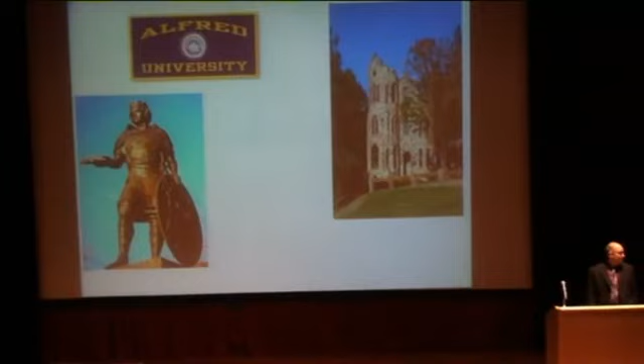So I want to start out talking a little bit about Alfred University, because it's had such a profound influence on me. Anyway, Alfred basically, when I came here, the only program they had was ceramic engineering, so that's what I studied. I wanted to be an engineer, and that's what we did. Ceramic car engines were going to be a thing of the future, and 40 years later, they're still a thing of the future. But regardless,

I want to take a second to acknowledge some of the people that at that time, when ceramic engineering was in its heyday, and the professors here. We didn't realize it at the time, but you look back now, we actually had like a Hall of Fame. This was like the New York Yankees of instructors for ceramic engineering.

Professor Burchett organized the study abroad program, which I participated in and did 8 months in Germany. Professor Pye is a world-renowned glass scientist. Professor Burdick, who's in the audience today, was a great instructor. Professor Tuttle for electrical ceramics. Professor LaCourse, who I had breakfast with this morning, for glass. And Professor Johnson taught us mud lab and how to get our hands dirty, really understand ceramics.

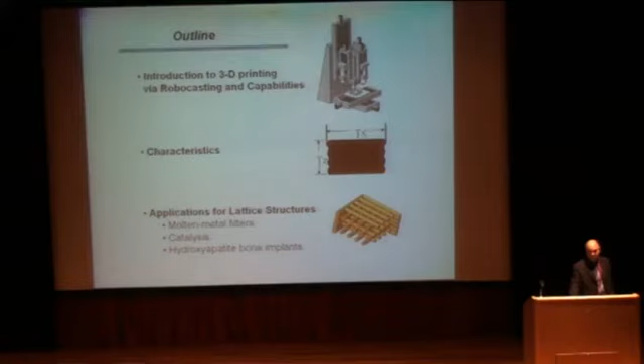3D printing, I think it's probably commonplace now, but when we started this work in the 90s, it wasn't. It's the idea of layered manufacturing. So instead of molding a part or machining a part, you're going to actually build a part. You can make a CAD model of a part, then build it in a series of layers, putting those layers together in some clever way so that you actually have some three-dimensional shape without ever machining or molding. Regardless of how you do that, that's the bottom line.

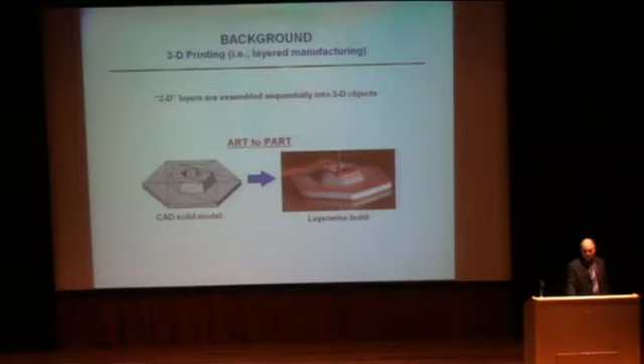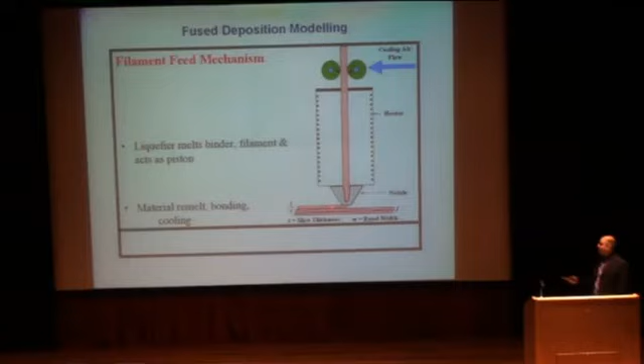It's an additive technique, and 3D printing has sort of become a universal name to describe that, when in reality there are several different ways of doing that. The most popular method is taking a plastic filament and heating it as it goes through a heated nozzle, and then depositing that plastic in such a way that it's molten here and then solidifies here. And so these are all the plastic printers that you see out there.

The most popular one right now is the MakerBot. With MakerBot, you can make unbelievably interesting, intricate, colorful parts out of different plastic materials. So they're really pretty and cool, but as far as technical applications, they're a little bit limited. But that's sort of where we're headed.

Now there are several other techniques for doing metals and some for doing ceramics, but I don't want to take the time to go into that unless somebody really wants to at the end.

What I want to tell you is the inspiration for my technique, or our technique, called Robocasting. It's along the lines of ancient Indian potters in New Mexico and Colorado who would take clay and roll it out into strings, then coil that clay up, layer by layer, until you got some sort of pot. So this isn't a new idea of how to make ceramics in layer manufacturing. It's several thousand years old.

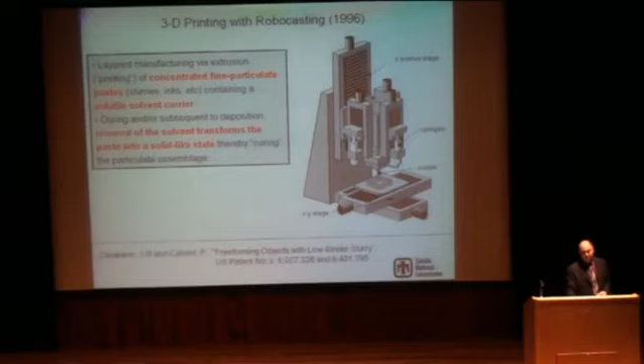If you look at a pot that's made like that, you can see the individual layers, but what you end up buying at the market, because they'll smooth this and then paint it, looks more like something finished. But it's made by a layered manufacturing technique, it's just done by hand. We're taking the exact same concept, but instead of using an Indian woman, we're using a robot.

So we have a CNC machine that will spit out a ceramic paste - I'll get into the properties of that paste. You draw any two-dimensional layer you want, then you move the machine up and draw another layer. Layer by layer, you'll have a ceramic part that is made of ceramic paste, essentially. The paste has particles in it and some solvent.

So Robocasting, this particular method, is layer manufacturing via extrusion. The important thing is that it's a concentrated, very high solid, fine particulate paste that is carried in some volatile solvent, like water, alcohol, or ketone. During the deposition process, the removal of just a little bit of that solvent will transform the paste into a solid-like state. So we're not curing the ceramic by freezing or by laser sintering or anything like that - we're, quote, curing it by just changing the solids loading a little bit and changing the rheology.

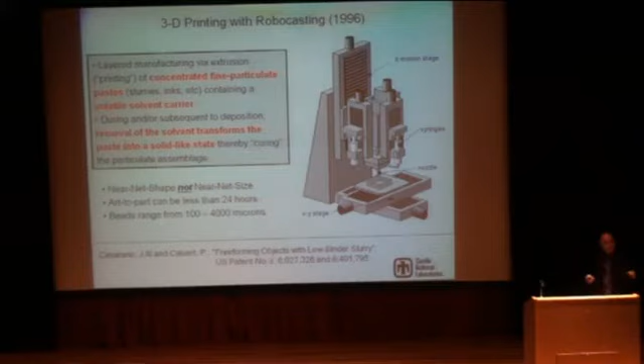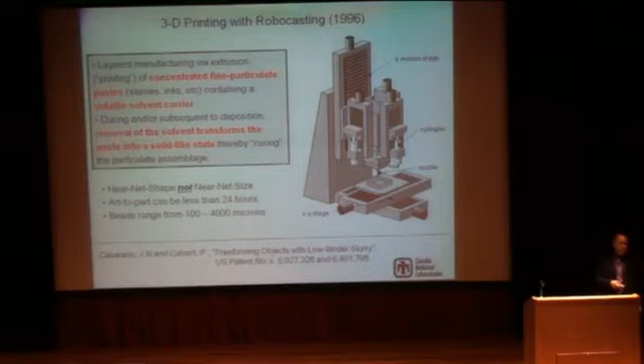As a result, when we make a ceramic part like this, the part is near net shape, whatever we design, but it's not near net size, because we do have to dry it and put it in the furnace so that it densifies and gives it the strength and properties it needs. That's important, because a lot of the 3D techniques now for plastics and metals are near net shape and near net size. We have to factor in shrinkage when we do it.

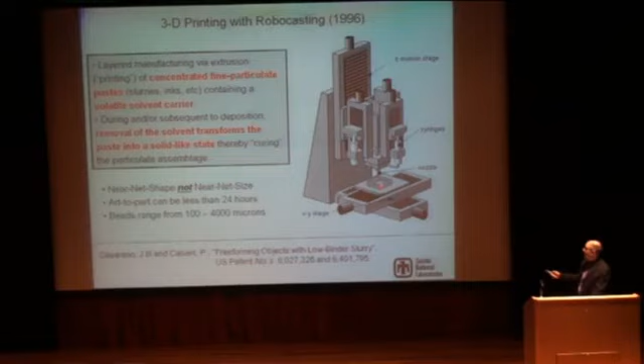So that might be a drawback in some sense, but the advantage is that this process is extraordinarily fast compared to other 3D printing techniques. And the size of the bead or extrudate that we can make is on the order of 0.1 millimeters to about 4 or 5 millimeters in size.

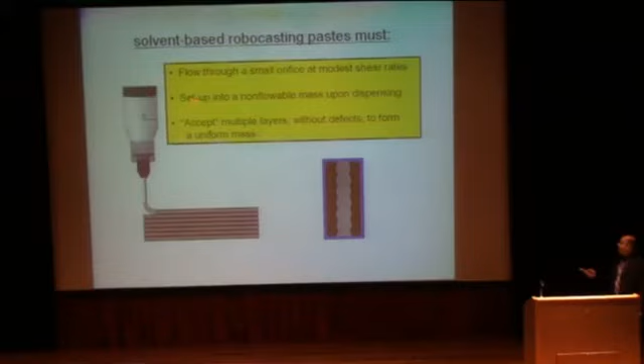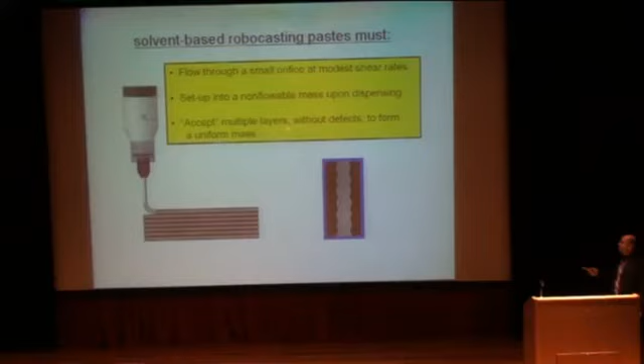So how does this work? You have to have 3 criteria for your starting ceramic paste. It has to be able to flow through a small orifice at a modest shear rate, modest pressure. Then when it comes out of the orifice, it has to set up into a non-flowable mass so it doesn't just spread over. But most importantly, once you put another layer on top, it has to accept multiple layers without defects and have them meld together, again without deforming and changing shape.

My advisor in graduate school was Professor Ilhan Aksay, and he had an interesting way of describing these kinds of colloidal systems that isn't fundamentally correct, but as a tool for ceramic processes, I think it's underlooked and can be used in a great way. So I'm just going to take a minute to describe it.

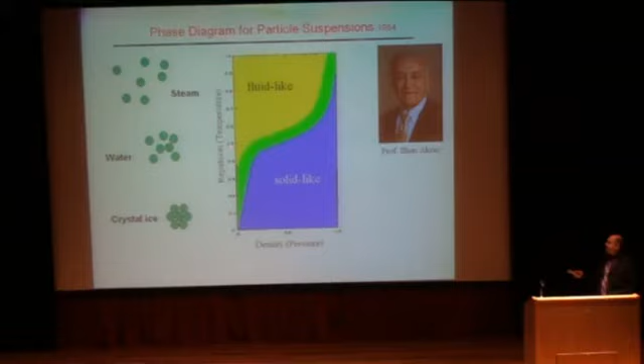In a typical phase diagram for molecules, let's take water as an example, what you get, whether it's a gas, liquid, or solid, is dependent on the pressure or temperature. At high temperature and low pressure, you're going to have steam. At lower temperature and higher pressure, you're going to have liquid. And at very high pressure or very low temperature, you're actually going to have ice and crystal. The molecules behave that way, where there's more repulsion between molecules in one state than when they're attracted in another.

So if you apply the same concept to particulate systems, colloidal particles in particular, you have a situation where you can describe ceramic processing. We've got the interparticle force, how the little particles repel each other, versus how dense they are, versus how many particles you have within your water or solvent system.

Now, when we do slip casting, we make sure that the particles are fairly repulsive, and the density is fairly low in the slurry, say 30 volume percent solids. To turn that liquid into a solid, you take the water out of that slurry by putting it in contact with plaster. The plaster sucks the water out, and that essentially increases the density and pushes you into a solid regime.

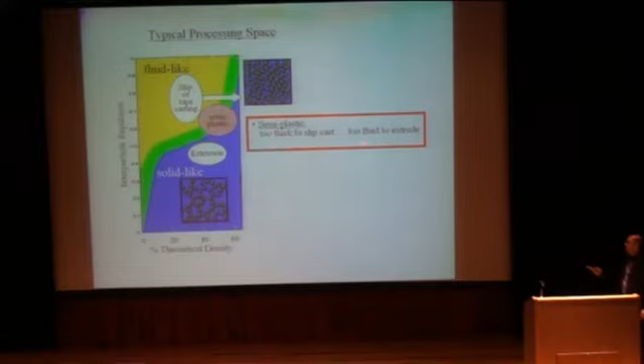Now, when we teach ceramic processing, all the different things, typically you're taught to work in this area or in this area, but this in-between area, where things are sort of semi-plastic and hard to control, you're taught is a hard place to work—stay away from that processing area. In those areas, it's too thick to slip cast, or too fluid to extrude. But that's exactly where we need to be for Robocasting, it turns out.

One of the possible ways to get there is by using what's called polyelectrolyte stabilization. Imagine this is the surface of some ceramic particle. We put these little fuzzy, highly charged molecules on the surface, we adsorb them on there, and now this becomes a bit of a barrier where we can control the repulsive force between other neighboring particles. This is what my graduate research is on, in that paper that Bill was talking about, which apparently is used quite often in ceramic processing classes.

Back in 1988, somehow this paper gained some traction, and it's very rewarding to know that it's being used in classes here and in classes around the world.

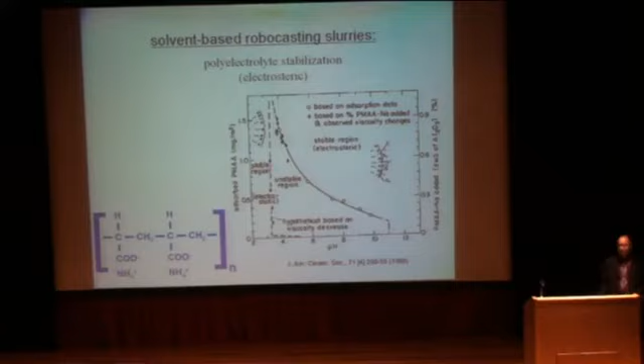So what that means is that depending on the pH and how much of this molecule you add to the system, you can control this repulsion between the particles, and we can tailor... well, actually, let me address this second.

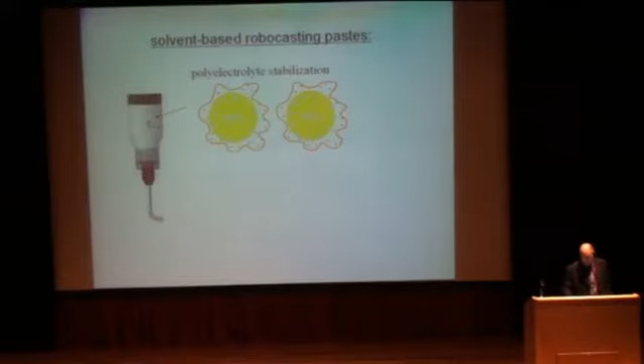Okay, back to the topic at hand. We're using polyelectrolyte stabilization to try to work closely to that semi-plastic regime, and then with just a little bit of evaporation, we can have a pseudoplastic, pliable slurry inside the syringe. After deposition, with just a little bit of evaporation, we increase the solids loading just enough to make this material now behave like a solid, even though it's still totally wet.

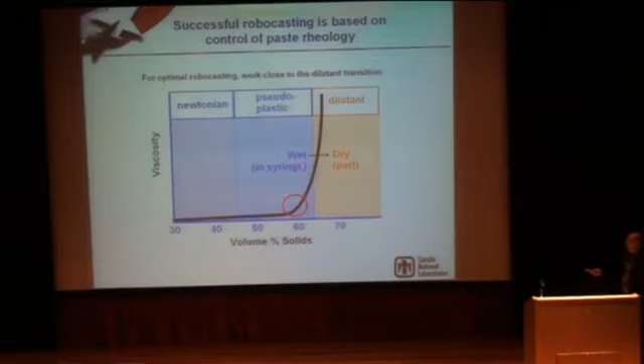So from a standpoint of viscosity, what we're doing in the syringe is working with pastes that are very close to the solids loading where the viscosity is pseudoplastic and very pliable. In this state, it's dilatant, and dilatant is a situation like wet sand on a beach, where everything's wet and saturated, but if you were to smack it, it feels like cement. It makes it more like a solid, and that's what we're doing.

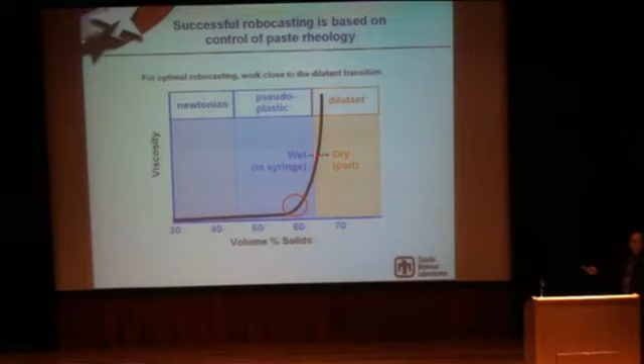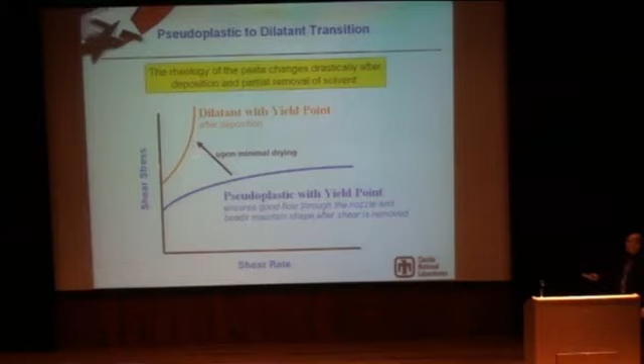So after it comes out, there's a little bit of evaporation, and living in New Mexico with a humidity of about 10%, you can get this transition to occur very, very quickly. So from a rheological standpoint, what you're looking at from a shear stress versus shear rate curve is: in the tube, you're in a pseudoplastic state with a yield point, and with just a little bit of drying, a transition to a dilatant state, where the more stress you put on it, the more the material resists movement.

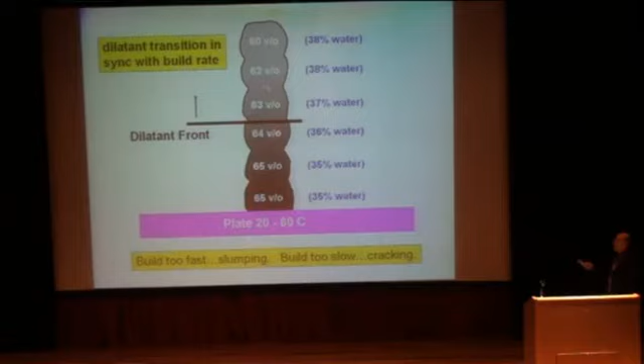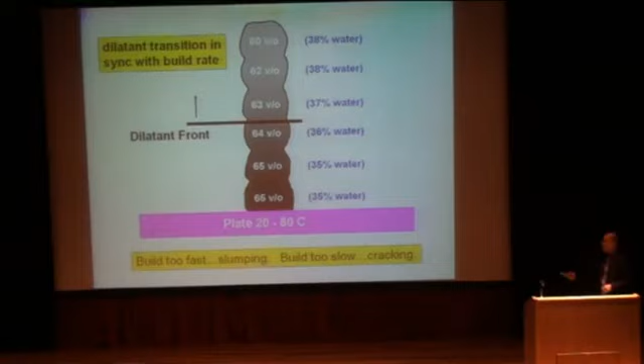And if you keep this pseudoplastic-to-dilatant transition in sync as you're building—this is a cross-section of a wall you build—if you keep that transition in sync with what you're building, then this becomes a strong enough platform that you can build more on top of it. If you build too fast, you'd eventually overcome the yield strength on the bottom, and the material in the part would slump. If you build too slowly, the layers wouldn't meld together and you'd get cracking. So you have to find the right situation to keep this transition in sync with your building rate. And when that happens, you can make, in the case of 1999, cool, useless parts.

We made a lot of cool looking things using the technology, but it was unclear what this would really be used for. That was about the time at Sandia National Labs when funding ran out on the project—it was a little bit before its time. So this technology that we developed, that we felt so good about, was going to be put on the shelf.

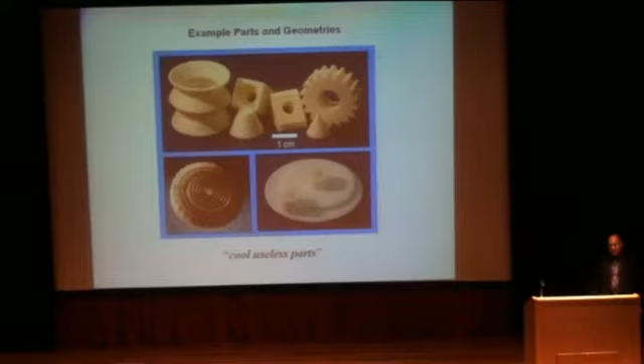That's when I started trying to figure out what I could do with this commercially, and negotiated with Sandia to start exploring other commercial applications for this technology, because none of the big companies were interested in investing in it. We eventually found that we could make some sort of cool, useful products.

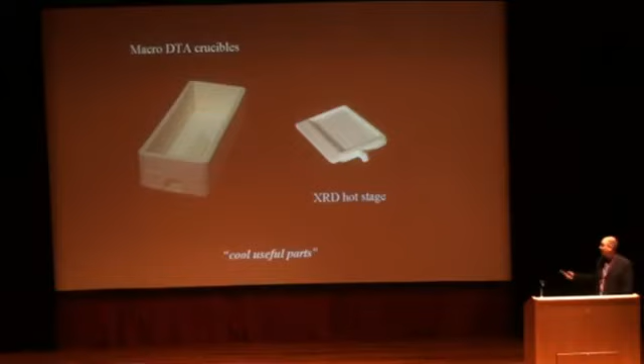Another area like that is all the consumables used for thermal analysis, either DTA or TGA—all these little cups. We can produce those for a fraction of the cost of what the manufacturers currently sell them for. We actually now have a little store on our website where you can buy this stuff.

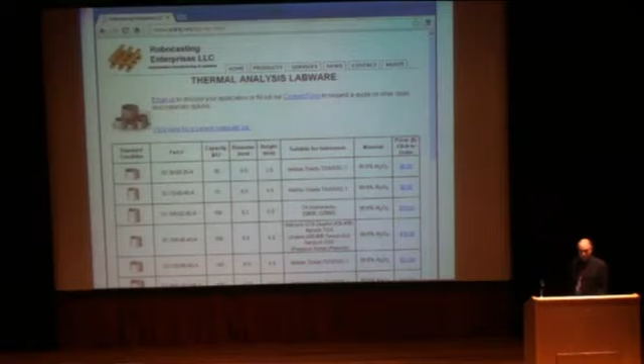But the other thing that Robocasting has the capability to do, which might have commercial relevance, is making composites. You can make composites by either making a preform with just one material and then infiltrating a second material, or you can use two discrete materials where you put an electronic circuit buried into some other material. Or you can have a fugitive material that is later burnt out so you can make channels inside the part. Or you can take it further and have controlled ratios of multiple materials.

Here's an example where we went from 100% silicon nitride on one layer and functionally graded this material to 100% tungsten on the top layer. Silicon nitride and tungsten could never normally be co-fired side by side, but by doing a functional grading, you can co-fire them—going from 100% ceramic to 100% metal in one operation.

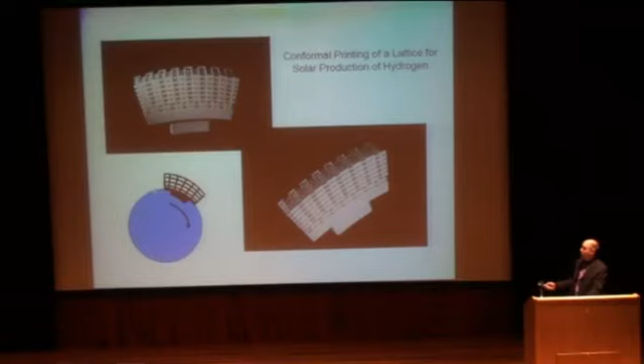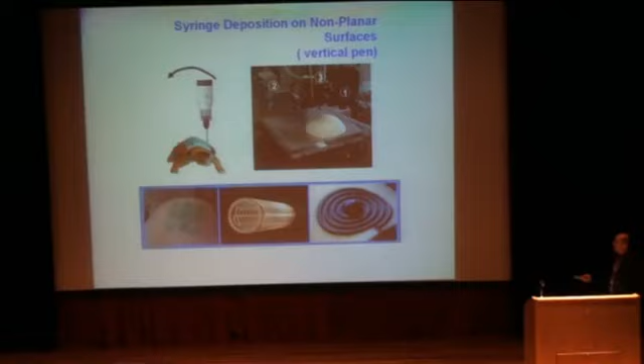We took the technology further and made it so that you don't just build on planar surfaces, but you can also build on non-planar surfaces. You can deposit on non-planar surfaces, and we demonstrated this with electronic materials, ceramics, and a bunch of pre-existing parts. We can also do precision printing of electronic materials.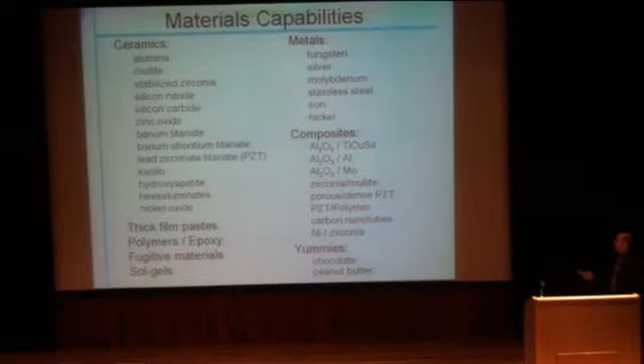The list of materials we demonstrated includes all sorts of oxides, nitrides, carbides, regular thick film pastes, several metals, and a bunch of different composites. We can also do chocolate peanut butter—those are usually the most popular.

So let's look at the characteristics and some of the realities of this situation. We're putting this down bead by bead in layers, and no matter what you do, you're going to have some microscopic defects between the layers, but also irregularity on the surface. This irregularity scales up with the size of the bead that you deposit.

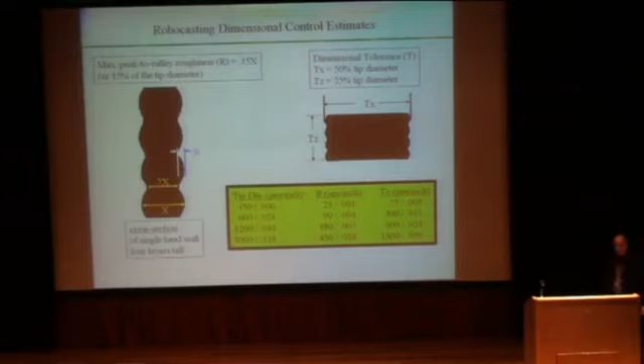Typically, about 15% of the diameter of the bead will be your roughness. If you're working with really small tips, really small nozzles, like 150 microns, you can get really fine parts, but it will take forever to build that part 150 microns at a time. Or if you want a bigger bead and build in one swipe, you can, but the drawback is a lot more roughness. Similarly, the dimensional tolerance in both height and width is related to the size of that bead, which takes away from your build speed if you're trying to get something smooth. So there are some things this just isn't going to be good for.

The other thing, as I alluded to, is that you're going to have microscopic defects between the layers. So we tried to see how bad a problem would be by looking at the flexural strength of bend bars versus the processing method, compared with more traditional ceramic processing techniques like pressing, isopressing, and slip casting—slip casting typically giving the highest strength.

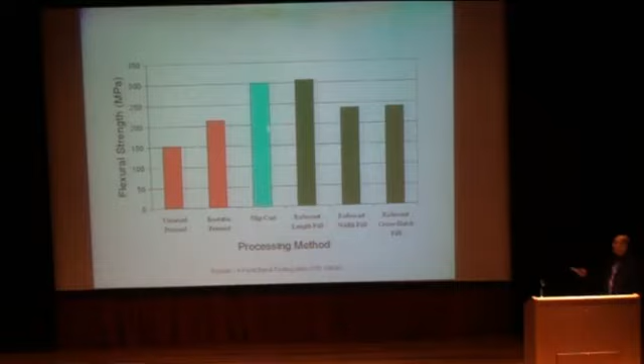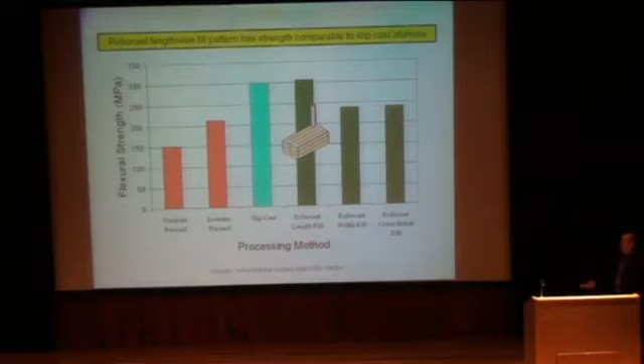What we found is that with robocasting, it's a lot like composites where you have directionality based on the micro defects between the layers. If you break the part lengthwise to the build direction, you can get strengths comparable to slip casting. But if you break in directions perpendicular to the build, all these little defective areas come into play when you try to bend that thing, and you'll actually reduce the strength by about 20%.

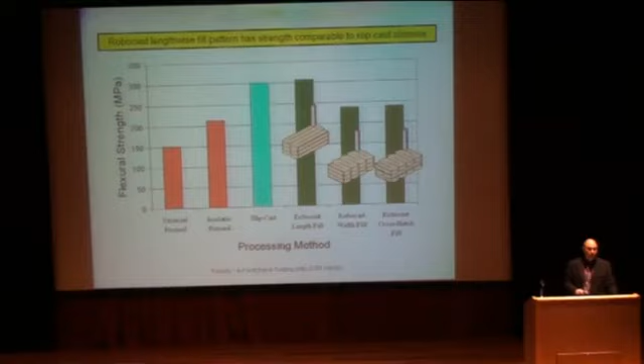So that's a reality: if you want to use these for advanced ceramics and really push the limits of the material, this probably isn't the best way to go. You're probably going to have to hot press and machine it, or something like that.

The other thing to take into account is build time. The time to build one cubic centimeter of material needs to be on the order of a minute or preferably less to be commercially relevant—economical enough to compete with other ceramic processing techniques, as a minimum. If you look at the build capabilities for robocasting, it's related to table speed, how fast you're depositing, but it's also inversely related to the square of the diameter. So the smaller the tip size, the more the build time goes up exponentially, taking you out of the range of being economical.

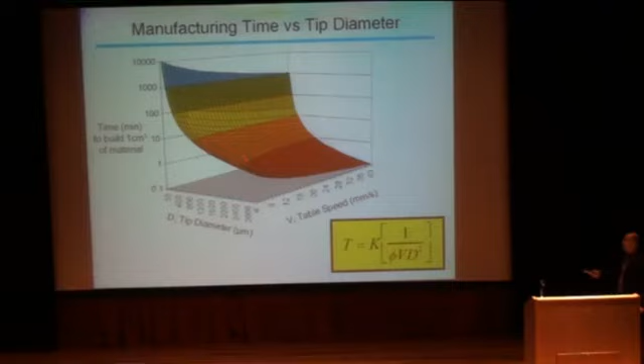So it turns out that where we can fit and still have adequate build times is on the order of about 400 microns and up, which limits some of your utility. So I think what I want to leave you with at this point is that it's a versatile tool, but there are inherent limitations: surface roughness, and that it's not near net size—it is near net shape—you have to deal with sintering shrinkages.

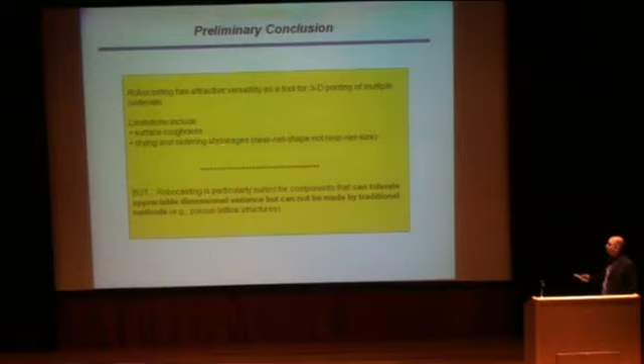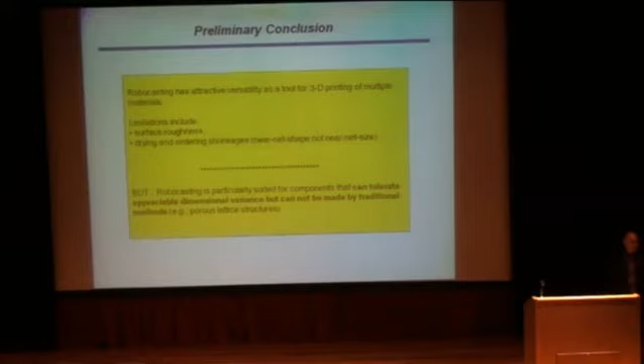So what's the niche for this? It turns out it's particularly suited for components that can tolerate appreciable dimensional variance but can't be made by a traditional method—something where we can make a structure with some performance that outweighs any detriment from making it cheaper, and that doesn't have to be high dimensional tolerance. It turns out that niche is these porous lattice structures.

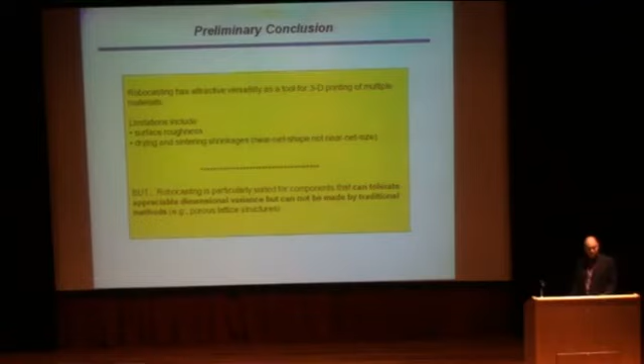So let's look at those in more detail. If you get the rheology right, you can actually build these lattice structures in one operation without requiring any support material. The material just spans the previous layer, and you can make these lattice structures.

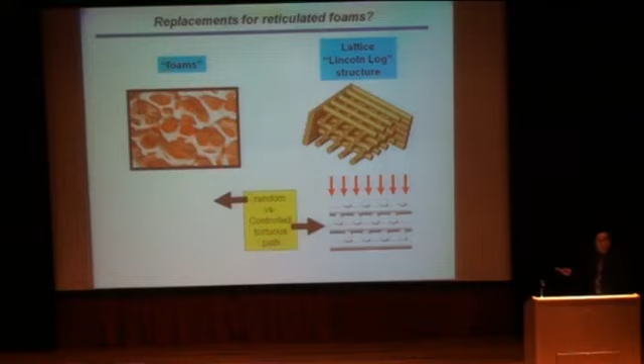Now, the lattice structures, we're looking at them as replacements in some niche applications for reticulated foams. Reticulated foams have been around for 30 plus years, where they'll take a sponge, coat it with a ceramic material, and then have a replica of a sponge, but now it's a ceramic sponge. One of the best companies in the world doing that was started right here in Alfred, and is still here in Alfred, High Tech Ceramics.

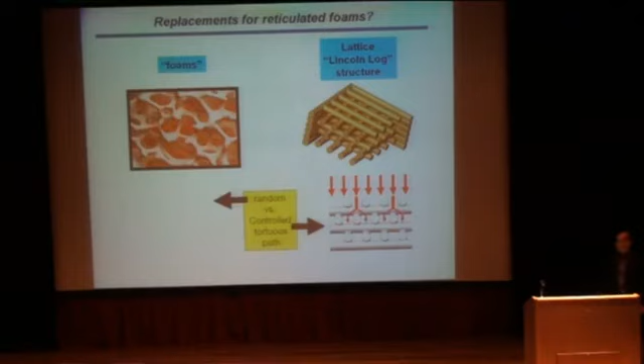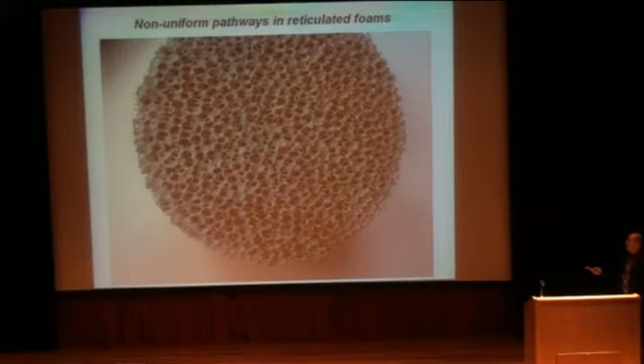A controlled pathway might have some benefit for some applications. One of the things with reticulated foams is that they work well. They're used, millions of them are used a year, and they work very well for most circumstances. But there are some problems or areas where it could be improved. You see these areas here where some of the pathways are clogged, and it's made up of very small struts, and sometimes these struts can break off. So if you're trying to use this as a filter, or as a catalyst support, you don't want that ceramic material going downstream, so it can be a problem.

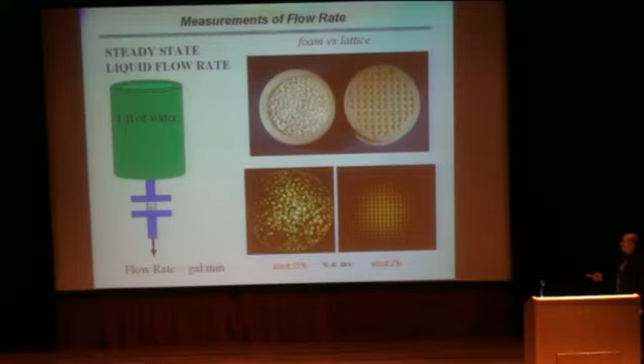The other thing is that they are very randomly structured. So we did a quick study to look at flow rates through typical reticulated foams and through our lattices, and the one thing is we can tailor the flow rate exactly to what we need it to be, and it's reproducible part after part after part. You can also make a structure in such a way that you create a bunch of turbulence as flow comes through in this region, and then on the entrances or exits, you can encourage laminar flow on the exit, so you don't have a bunch of craziness going on outside. So you can do whatever you want with these lattices to fit a particular application.

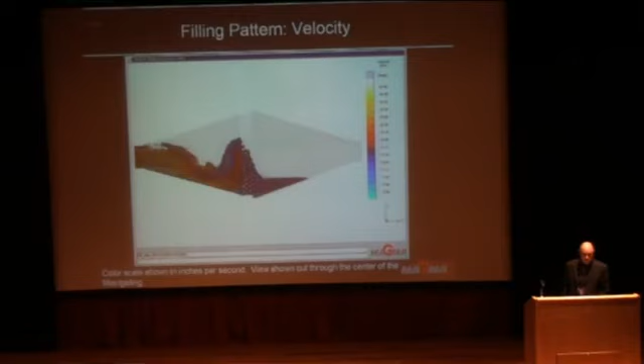This is an application showing using a lattice structure for filtering molten metal. This is a model that was done. You can see that we're creating a bunch of turbulence, hopefully collecting a lot of slag and impurities in here, and then it comes out nice and laminar, so it goes into the mold nice and clean.

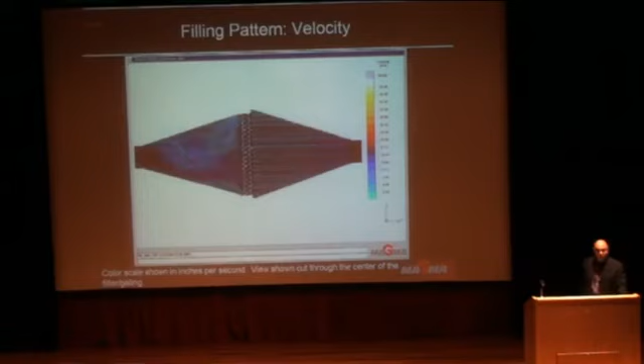You can also do graded porosity, where we want to trap big things first, and then finer things as we go through, to increase the capacity of the filter you use in one operation. And now we've started making designs that have radial filtration, so filtering from the inside out or the outside in.

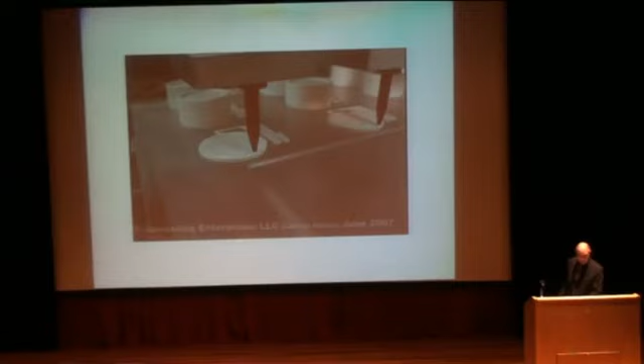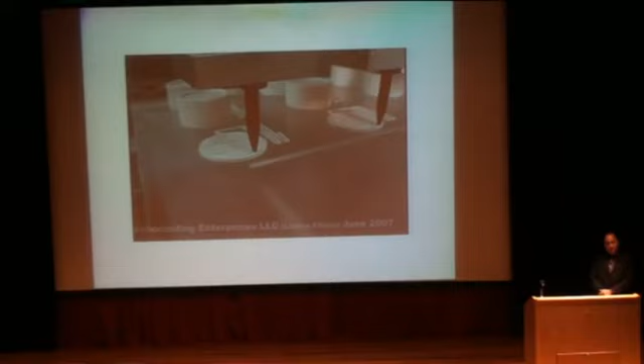The thing is, we can make all that stuff, but the time frames to be even closely competitive with reticulated foams is impossible. The only way you can do it is if you start doing things in parallel. So say it takes, for instance, 10 minutes to build a part - that's not going to cut it from an economic standpoint. But if I can make 10 parts at a time, now I'm down to a minute. If I can make 20, now I'm down to 30 seconds. So that's what we're working on now at our company, trying to scale things up.

Here's sort of a real-time situation of building a part. Like I said, we can scale things up to make things in parallel. And it actually is turning into a real product. So we've got lattice filtration, our logo, and we're making all sorts of these structures.

Most recently, we got an NSF grant to start looking into building larger filters. This one's about 6 inches tall. This is in collaboration with Cesarano, a company that started here at the incubator in Alfred. We're trying to use microwave technology to see if we can make that more economic.

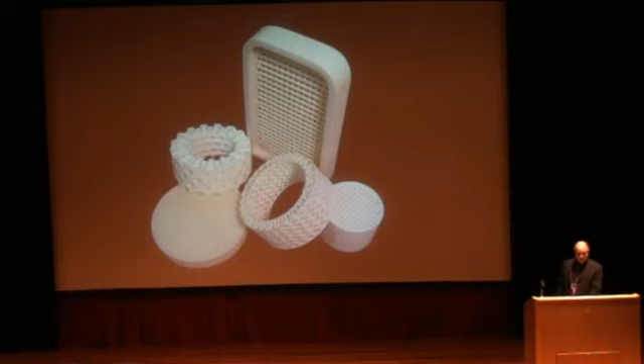When we started out in 2007, we were making just a small amount, and each year we've grown. This is actually an old slide - we're now to the point where we're making over 1 million filters a year. Our capacity's grown from 200 a week to over 20,000.

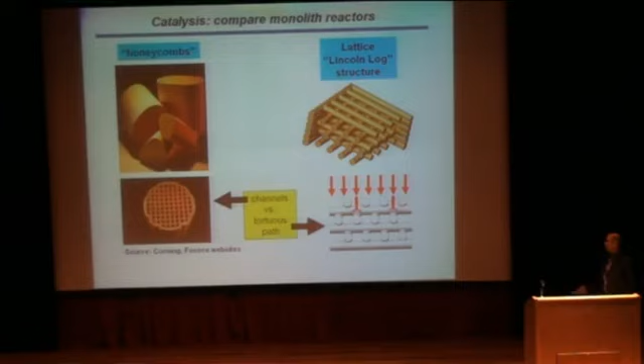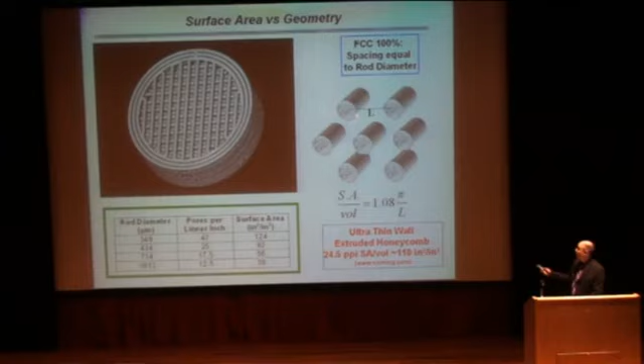The other thing these structures could be used for, the exact same structure, is for catalyst supports. Catalytic converters in cars are made out of honeycomb cones with straight-through channels. In this case, we can make a lattice structure so reaction rates increase because of the tortuosity built into it. We can also change the surface area by changing the rod size and spacing between the rods to whatever it needs to be.

I'll quickly show you a comparison between an oxidation reaction where we convert carbon monoxide into carbon dioxide using a platinum catalyst, a platinum catalyst on this honeycomb structure.

You can imagine as the gas is flowing through here, in order for the reaction to occur, that gas has to get to the surface. It's all diffusion related. However long it takes for that gas to get to the surface is going to control the reaction rate.

Imagine water going through a hose. If you put that velocity up really high, the water in the center of the hose is never going to actually get to the wall, so you'll never be able to complete the reaction.

And that's what we did here. We turned the reaction rate up, put the flow rate up high enough so the reaction couldn't occur totally within the honeycomb because it was going through a straight-through channel. But with the exact same conditions and exact same amount of catalyst, a Robocast structure lets us get that reaction to go all the way to completion.

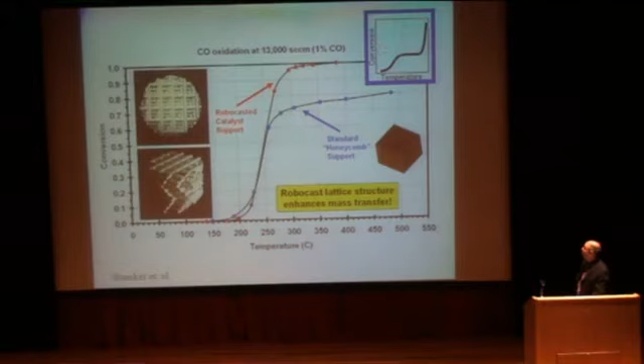Essentially what we're doing by using this structure is increasing the mass transfer coefficient and getting rid of that limitation. The same thing occurs when combusting methane, where we can reduce the combustion temperature of methane by about 200 degrees, meaning we can combust methane at a low enough temperature that we don't produce NOx, helping pollution control around the world.

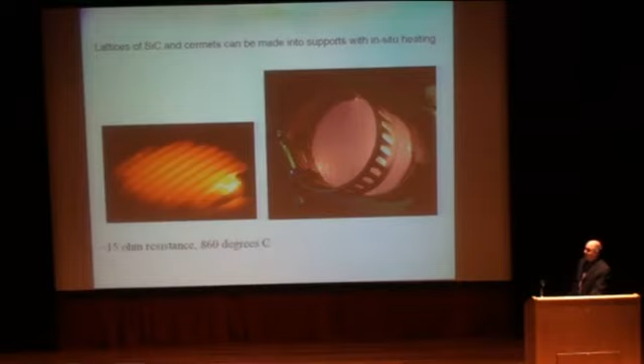We've taken a step further and made lattices that can actually heat up with some voltage, and those are being looked at for diesel particulate traps. We also make graded structures to trap a flame below the surface for infrared heaters.

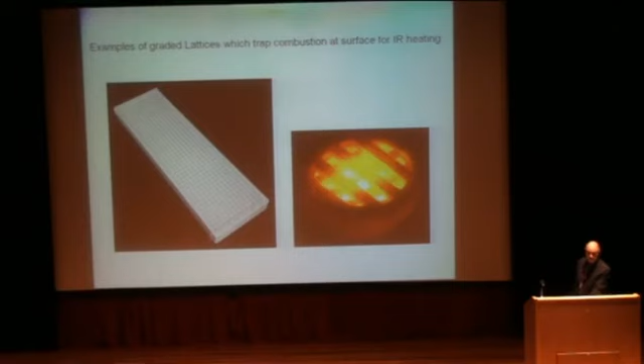Just an example of more catalyst supports out of different materials. And if I've got time...

About 2 minutes. I'm going to go through using the same lattice technology for bone scaffolds. It turns out we can make a bone scaffold out of hydroxyapatite, and give it the same properties as natural bone so that it's machinable.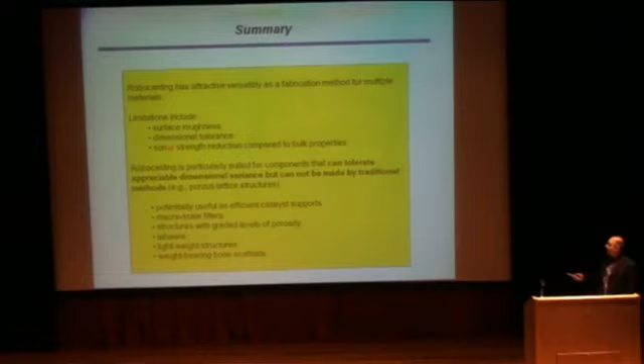We did testing on goats, and it worked very well, with new bone being grown within 8 to 12 weeks. So a quick summary: we've got limitations in the process. It's not the be-all, end-all, but it does have real commercial utility for catalyst supports and filter structures in labware.

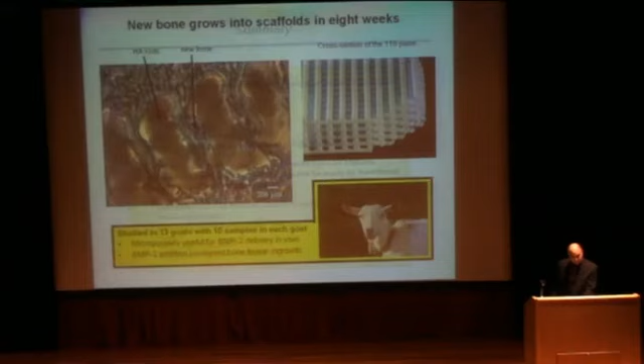As far as I wanted to give, especially the young engineers, a little touch of commercial business experience: I started out as a scientist with an idea in the laboratory, and we took it to the demonstration level, and then actually tried to turn it into a real business.

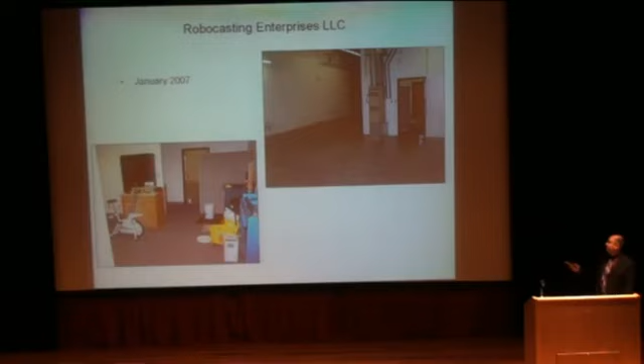In 2007, we figured out something to do with it. We got a license agreement with Sandia, turned it into an LLC, and moved into a warehouse, starting from scratch. There she is, on the floor.

This was our place in 2007, about 1,700 square feet. And then we had to start doing everything ourselves, right? When you're a small company, you have to clean the toilets, do the marketing, build the products—you have to try to do everything at that point. But it's been successful over the past 7.5 years, and we just recently bought a new facility and remodeled it, moved in. We now have about 6,500 square feet of space with furnaces and multiple lines.

I talked about doing things in parallel, doing things many at a time, and making things commercially relevant.

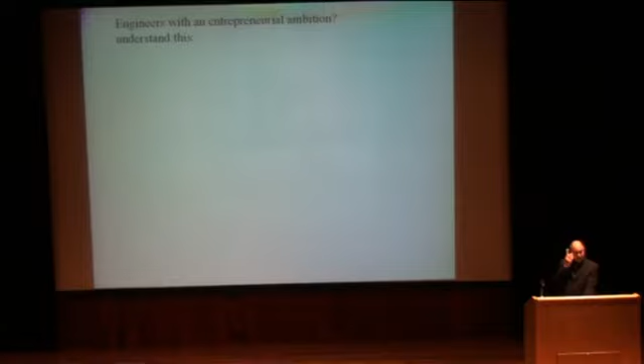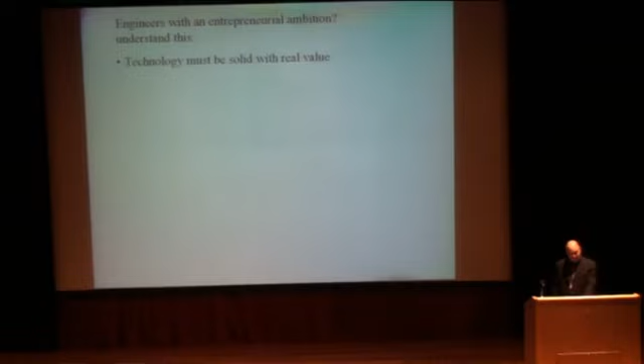So here's what I want you to do today. If you're an engineer that has an ambition or an entrepreneurial spirit, I want you to understand a couple things. First of all, the technology must be solid. You have to have something that's real—people will see through it if it's not. But in reality, the technology is perhaps maybe 10 or 20% of the business at most. You have to understand how to turn it into something that somebody's willing to pay for.

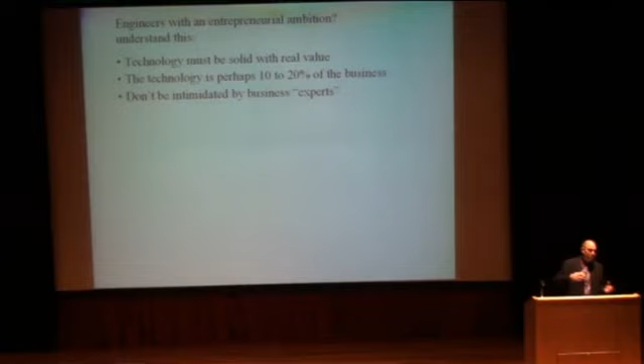And when I say that, it sounds intimidating. All the business experts are going to tell you that you have to go out and get venture capital, you have to have a business plan, you have to do all this stuff. They'll try to make sure that you have investors and reduce your ownership. And that can be fine, but what I'm telling you is don't be intimidated by all these experts. I'm telling you that engineers can learn everything you need to know about business 10 times easier than somebody in business can learn engineering.

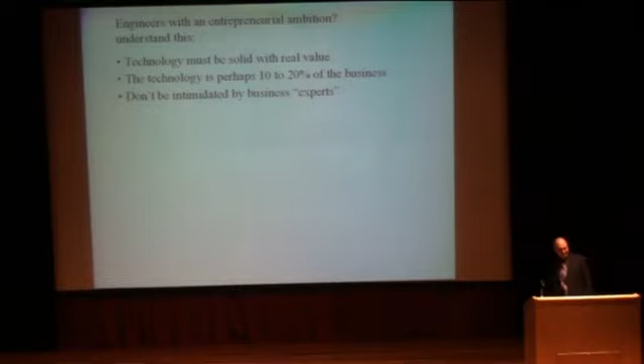So take your time, learn what you need to do, talk to a lot of people that have done it before, but you can do it. You need to understand the weaknesses, though. There's a lot of engineers that just—

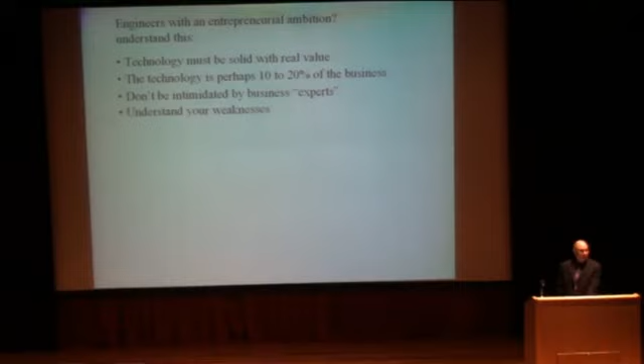You'll know very quickly whether this is going to work or not. In our instance, if after a year or two on the marketplace, big companies start trying to take you out, or people start trying to infringe on your patents, you know you've got something. If nobody gives a damn, you might as well close up shop.

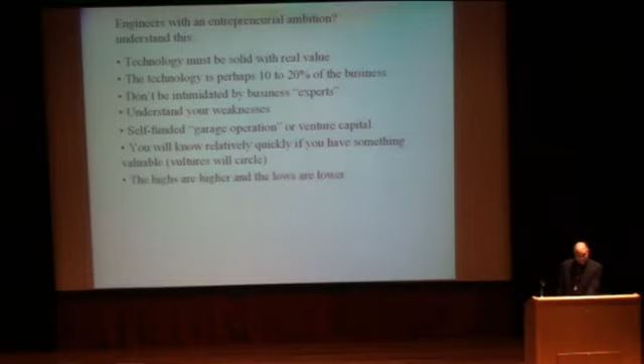Keep in mind that the highs are higher emotionally and the lows are lower. You feel like you're your own boss, but you're not your own boss at all. You're better off working for somebody than thinking you're going to be your own boss in a small business. Your boss now becomes the customer, the insurance people, the lawyers.

But more importantly, your boss becomes your employees, especially in a small business situation where these people took a gamble and work for you. You feel such an unbelievable obligation to fulfill their livelihood, for their families, that you have to take that seriously. Everyone gets paid before you get paid. And you have a responsibility to try to honor these people for taking the gamble to come with you. That's a big thing.

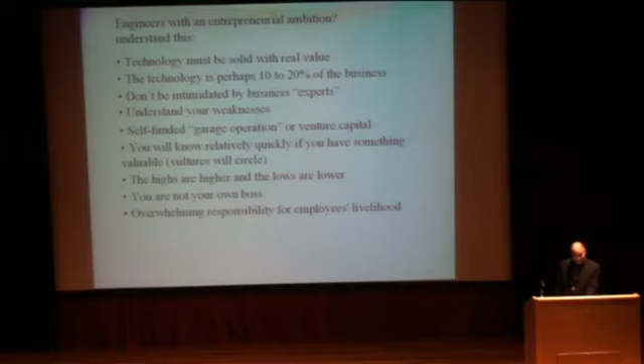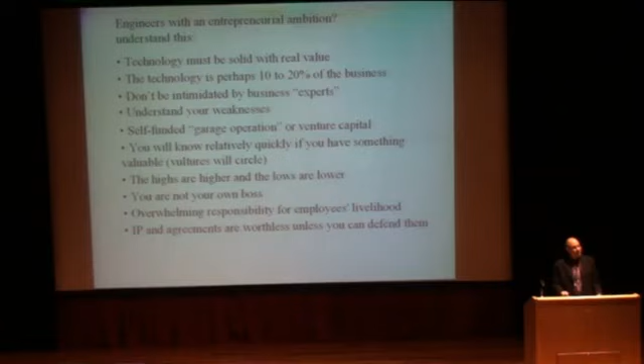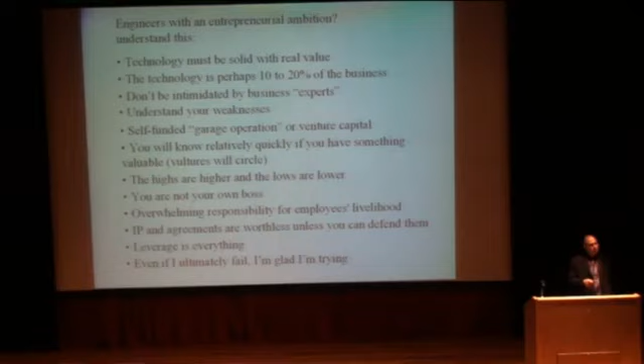And the bottom line is, regardless, even if it doesn't work out—even if it doesn't work out 2 or 3 times—if you've got that ambition, it's worth it. You learn so much, and even if you ultimately fail, I'm really glad I did it. I just want to leave you with that message.